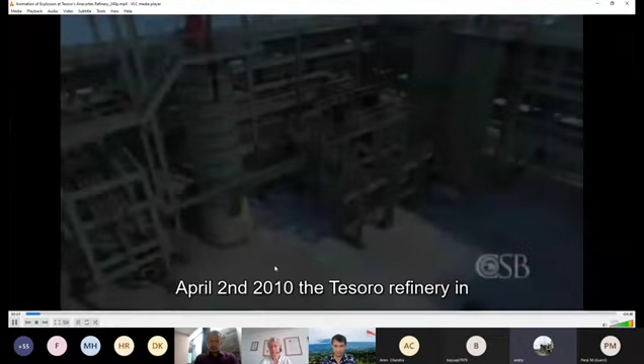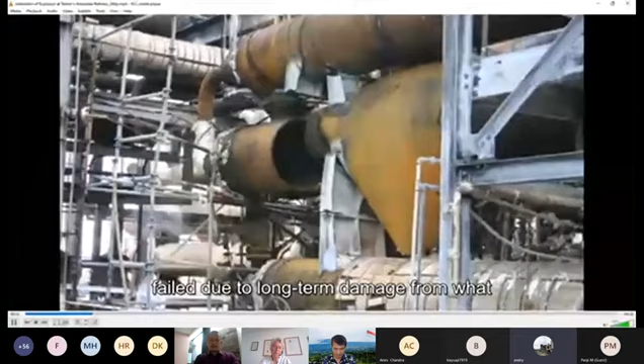April 2nd, 2010, the Tesoro Refinery in Anacortes, Washington. A nearly 40-year-old heat exchanger violently ruptures, causing an explosion and fire that kills 7 workers, the largest loss of life at a U.S. refinery since 2005. The Chemical Safety Board launched an investigation and determined that the heat exchanger catastrophically failed due to long-term damage from what is known as high-temperature hydrogen attack.

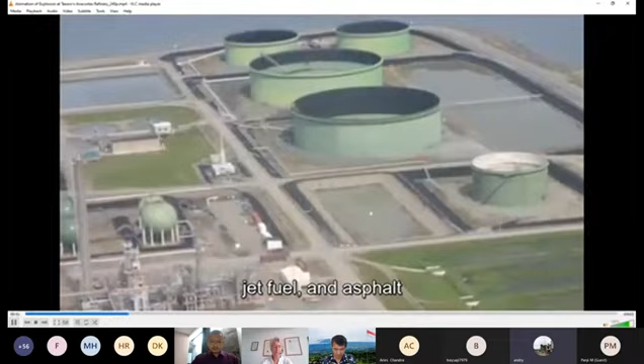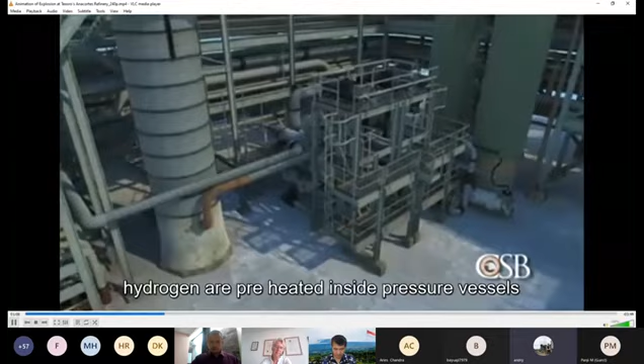The Tesoro Refinery in Anacortes is an 800-acre facility located approximately 70 miles northwest of Seattle. The refinery produces a variety of products, including gasoline, diesel, jet fuel, and asphalt. Within the refinery's naphtha hydrotreater unit, raw naphtha, a light component of crude oil, is treated to remove nitrogen, sulfur, and oxygen impurities. Before entering the unit's reactor, the raw naphtha and hydrogen are preheated inside pressure vessels called heat exchangers.

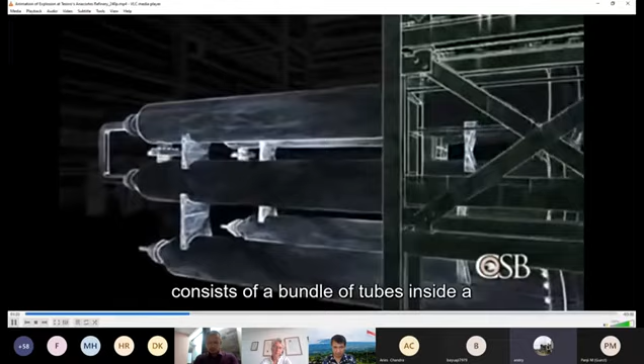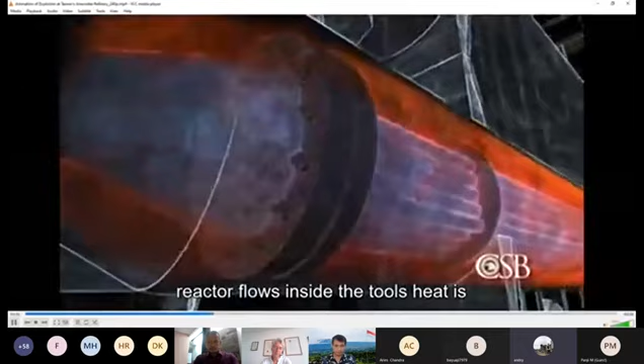The unit contains 2 banks of 3 heat exchangers supported by a 3-level steel structure. Each heat exchanger consists of a bundle of tubes inside a steel shell. Hot fluid exiting the reactor flows through the heat exchanger shell, while cool fluid headed for the reactor flows inside the tubes. Heat is exchanged through the walls of the tubes.

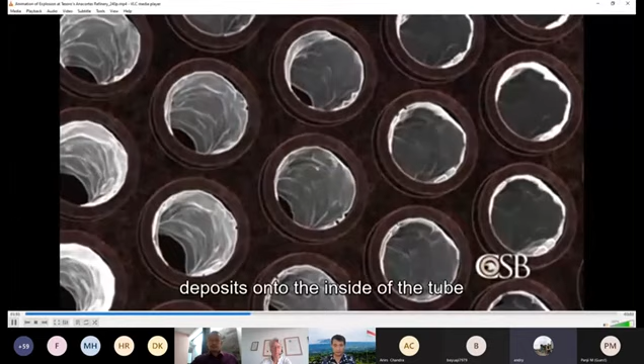Every 6 months, the heat exchangers are taken offline to be cleaned because of fouling, a common occurrence when operating heat exchangers in this type of service. As the raw naphtha is heated, a scale-like material forms and deposits onto the inside of the tubes, hindering the transfer of heat in the exchangers.

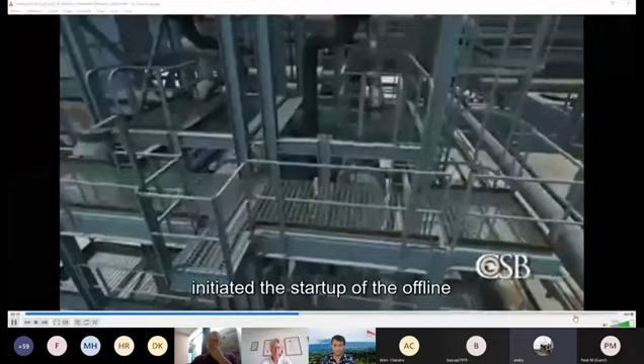On March 28, 2010, 1 bank of heat exchangers was taken offline and disassembled for cleaning, while the other bank remained in service. This allowed the unit to continue to operate. By mid-afternoon on April 1st, the cleaning was complete, and operators initiated the startup of the offline bank of heat exchangers.

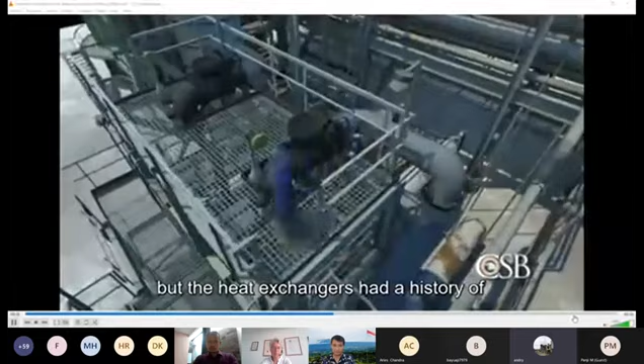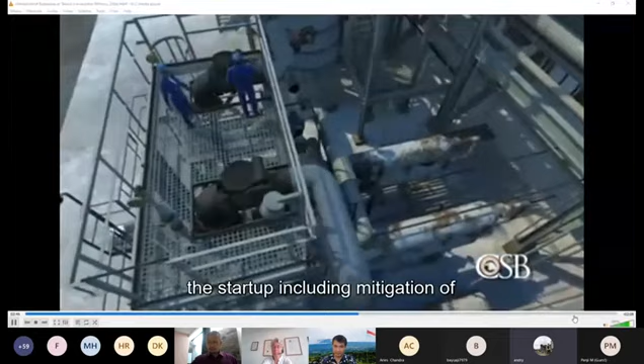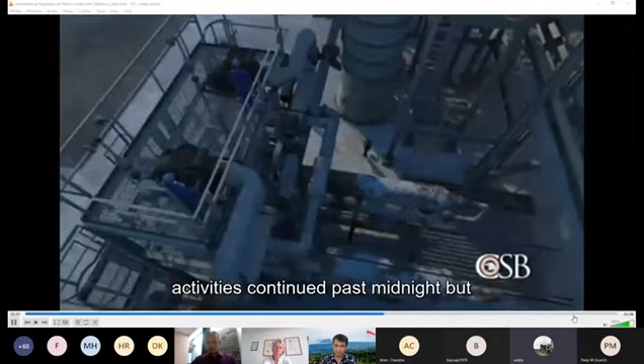The procedure required an inside board operator monitoring the control console and 1 outside operator opening and closing large manually operated valves. But the heat exchangers had a history of developing leaks during startup, something that refinery personnel had come to see as normal. Additional operators from other nearby units were called upon to assist with the startup, including mitigation of potential leaks. By 10:30 p.m., the outside operator was joined by 6 workers from other units within the refinery. The 7 workers were located around the heat exchangers, where startup activities continued past midnight.

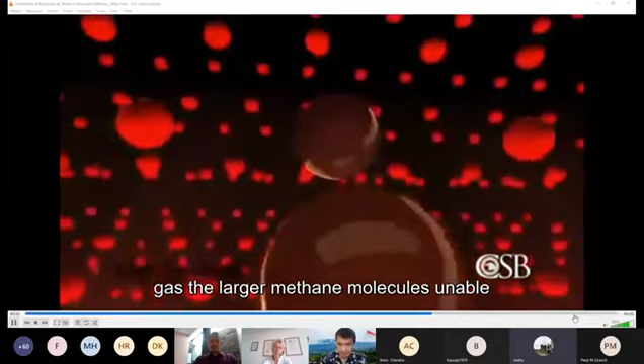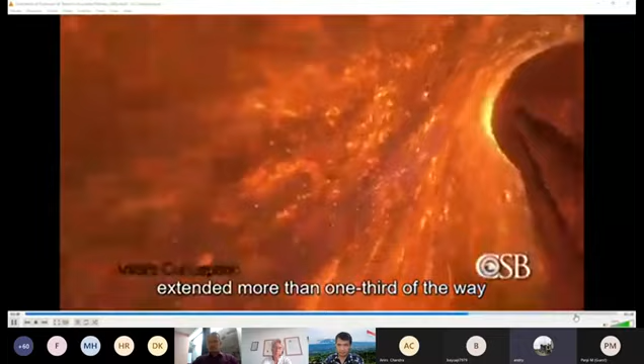But unknown to the workers, the steel shells of the middle vessels in both banks of heat exchangers had been severely weakened due to cracking caused by high-temperature hydrogen attack. This occurs when tiny hydrogen atoms diffuse into steel at a high temperature, then react with carbon in the steel to form methane gas. The larger methane molecules, unable to diffuse out of the steel, accumulate, stressing the steel and over time causing fissures. In both of the middle heat exchangers, the fissures grew and connected to form large internal cracks. One such crack was 48 inches long and extended more than 1/3 of the way through the vessel's 1-inch thick shell.

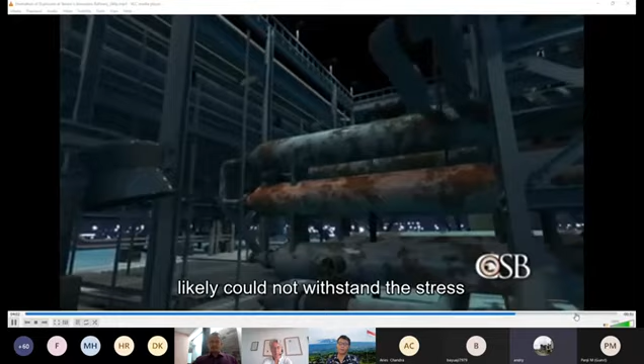Shortly after midnight, the temperature of the fluid exiting the tubes of the online bank of exchangers increased about 75 degrees over the span of 3 minutes, a temperature increase that was typical and observed in previous startups. But the middle heat exchanger was so severely weakened from high-temperature hydrogen attack that it likely could not withstand the stress caused by the rapid temperature increase.

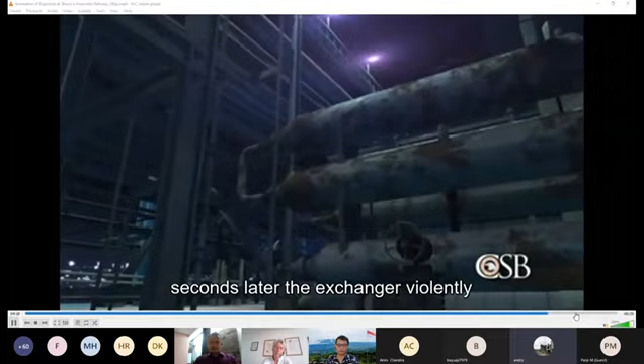At 12:35 a.m., employees working at a nearby process unit heard a loud hissing noise when vapor began to leak as the heat exchanger cracked at its weakest point. Seconds later, the exchanger violently ruptured. Hot hydrogen and naphtha vapor rapidly vented from the exchanger and spontaneously ignited upon contact with air, resulting in a massive fire that consumed the heat exchanger structure.

3 of the 7 operators died at the scene. The other 4 operators were transported to local burn centers with severe injuries. 2 died within hours. The other 2 succumbed within days.

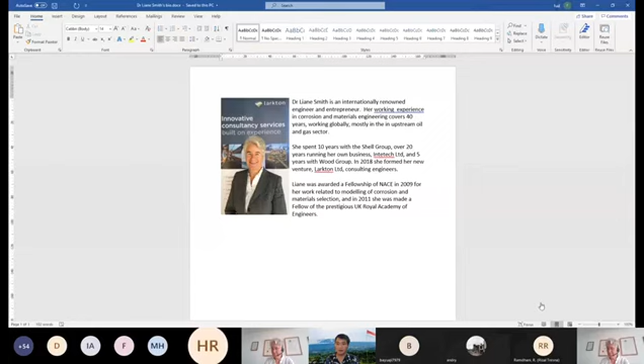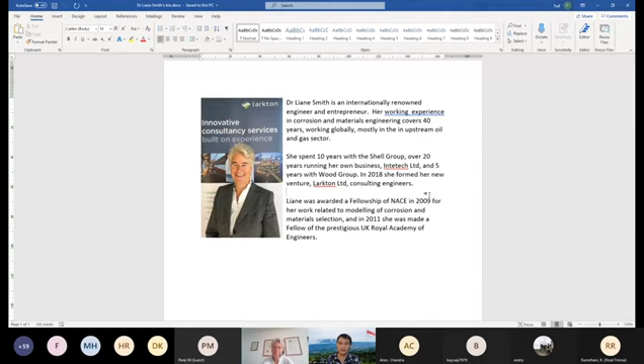Dr. Liane Smith is an internationally renowned engineer and entrepreneur. Her work experience in corrosion and materials engineering covers 40 years, working globally, mostly in the upstream oil and gas sector. She spent 10 years with the Shell Group, over 20 years running her own business at Intetech Ltd, and 5 years with Wood Group. In 2018, she formed her new venture, Larkton Ltd, consulting engineers. Liane was awarded a fellowship of NACE in 2009 for her work related to modeling of corrosion and materials selection, and in 2011 she was made a fellow of the prestigious UK Royal Academy of Engineering.

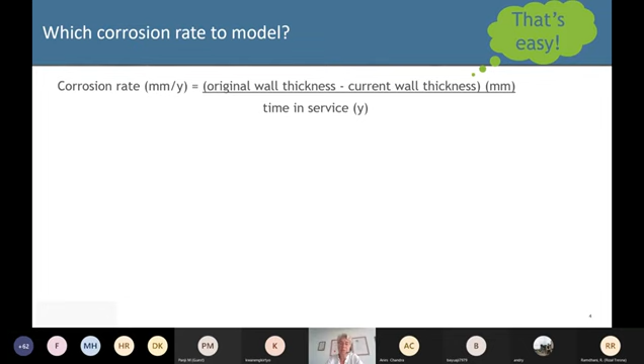So let's get started. We're talking about CO2 corrosion, internal corrosion—so what is the corrosion rate? That's pretty easy, isn't it? We all think we know: just find the difference between how much steel we had at the start, how much we've got now, and the time difference between them. So if it's that easy, what's the problem really?

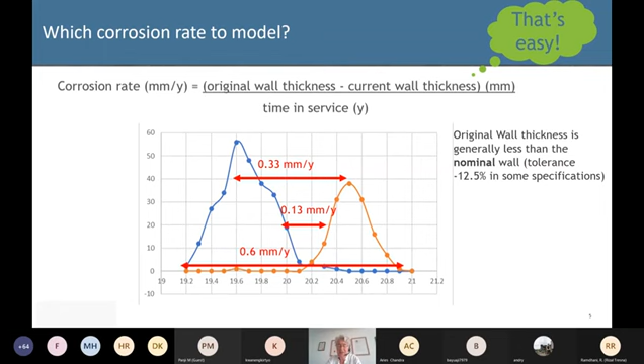The difference between original wall thickness and current wall thickness could be almost any number you choose, depending on what you pick for each. We normally work from the nominal—if you think about risk-based inspection, you ask what it was originally, and that's the nominal wall thickness. But the tolerance is up to minus 12.5% of wall thickness in some specifications, and fittings can be very variable in wall thickness—thicker on one side, thinner on the other. The inspected wall thickness is not necessarily the thinnest location either; even the best inspection methods are only sampling.

So even a 40-finger caliper tool, as I'm showing on the left, which can be pulled through tubing, will actually only be sampling maybe up to about 10% of the area of the pipe. So when people say to me, does modelling work? Does it represent real life? The answer is, well, we don't actually even know what real life is.

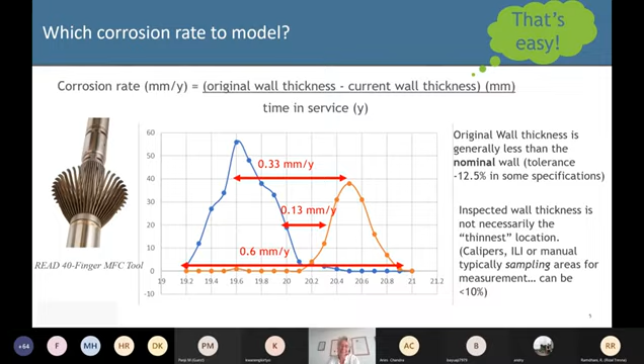So it's just to keep in mind that we do our very best, but corrosion engineering is a complex science, and there are difficulties with it.

They all corrode down to around the same depth. And this is what we call mesa corrosion. It's a term that got established for this type of corrosion. And I call it generalized attack.

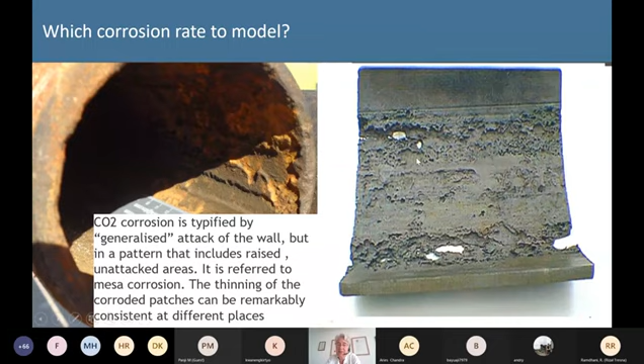So what we're trying to model is the rate of attack at the bottom of these mesas. So really, how deep are we going through the steel in the areas that are not protected?

In the early 1980s, I began work with Shell in 1981, and he was at the time working with me in the Netherlands, and we had the problem of CO2 corrosion arising in what was called the Groningen gas field, the largest gas field in Europe. It had about 0.7 bar of CO2, and at the typical temperatures of 40 to 50 in the field, we were getting corrosion rates of about 0.7 millimeters a year.

And you can see that if you could move this line on this nomogram and you could link up 0.7 and about 50 degrees, you'd go through around about 0.7 on the corrosion rate chart. So this is an illustration that's important, that when people do work on corrosion, they're working normally for a system. They're trying to explain something. And CO2 started with that gas field and trying to understand that gas field.

And then what happened, of course, is that people started to say, well, we've got CO2 corrosion elsewhere. We've got CO2 corrosion in other parts of the world. We want to use this tool. And it's a question about how widely can you stretch the use of a tool like that.

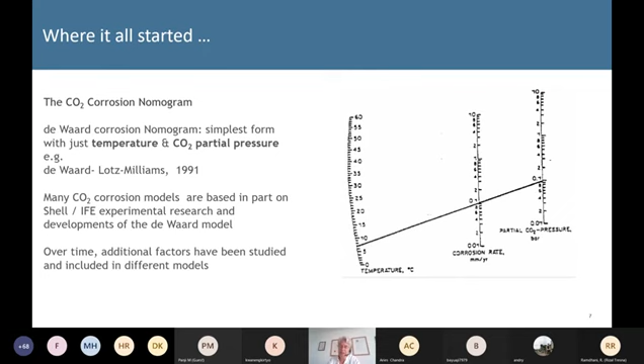Now, many corrosion models have been developed from this. This original research done by Shell in Amsterdam was expanded by a lot of work in the Norwegian lab, IFE, and over time additional factors were taken into consideration. But this is where it all began.

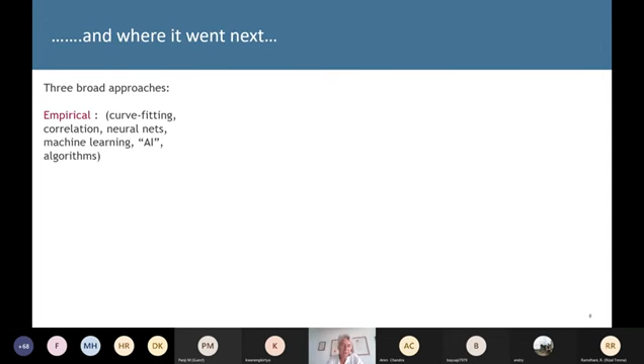Now, where are we with modelling nowadays? And I'm going to outline three broad approaches. We've got an empirical approach, we've got semi-empirical, and we've got a mechanistic approach.

Now, some people think that machine learning and AI and everything like that is new. I can tell you that in the mid-80s, Kees de Waard and I were having discussions about should we be looking at neural nets - that was the big topic to discuss. We thought a lot about it, but what was apparent was that it's even more focused, because when you build up a knowledge base that these systems can work in, you have to have a set of data.

You need an awfully large amount of good quality input data. Normally you need a training set of data that you use to set things up, to build your artificial intelligence and write your algorithm, and then you test it against other things. It's very difficult to give that system validity beyond where it started, just as much as the original nomogram, to be fair. But I can say that at the moment, success has not been great with CO2 corrosion.

There could be other areas where this does have success, and we now have such better computing power that there could be opportunities in the future, and we can come back to that at the end.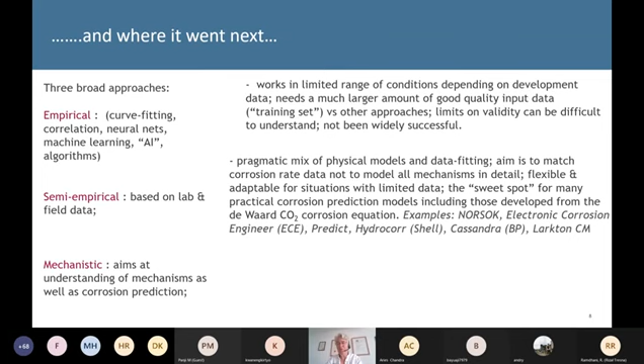They're all developed from the original de Waard CO2 corrosion equations, and improve on it and grow on that, with expertise built in from the different people who've developed these models.

Finally, the mechanistic model is really focused on the chemistry and understanding what steps are taking place, where the cathodic and anodic reactions go, what's happening to the protons and so forth. If we could really truly understand all that, the thought is that this would be the most correct approach, and it would be more accurate and widely applicable.

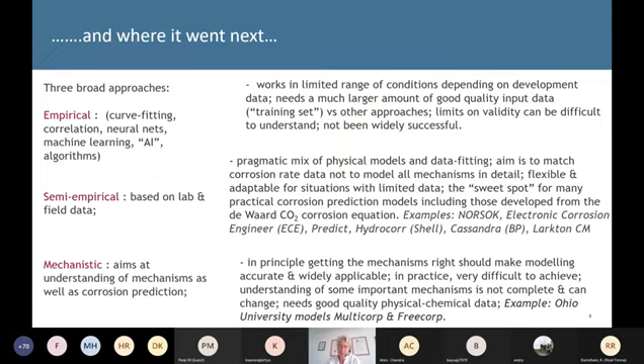But in practice, there's been a lot of very good work done by workers, particularly at Ohio University in the United States. But when they make major steps forward in understanding, their change in understanding means they almost have to put aside a lot of their previous work and start again. It's very challenging. What I'd say is their work has really opened our eyes and given us a lot of insight, helping to improve many of the semi-empirical models.

So going to the semi-empirical, which is where we are today, if you look in the literature papers, you'll find this basic resistance model. It says there's an activation energy.

If the activation energy is low, so we've got a fast reaction process, then we're limited in how fast the corrosion rate goes by how fast we can deliver corrosive species to the steel surface, and vice versa. If the flow is very fast, then the rate of corrosion is determined by how fast the reagents can actually react at the steel surface.

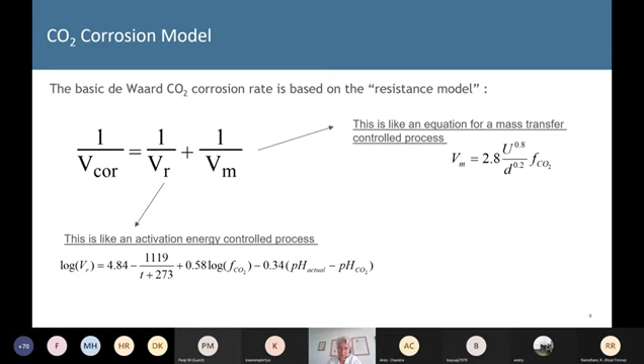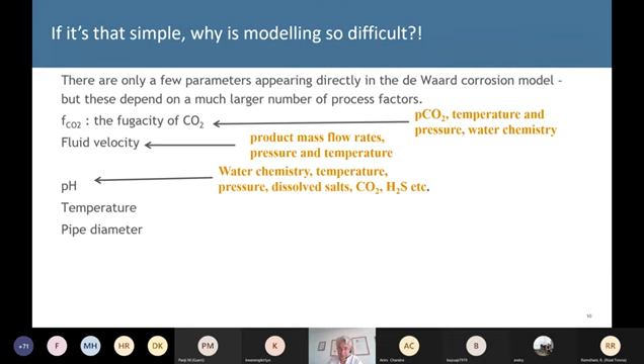The issue is that each of these factors is actually influenced by an awful lot of other factors. So when we want to take those five inputs into the equations, we've got to gather a lot of other data and detailed information in other areas. In fact, the list of inputs to our corrosion models is more like 15 parameters rather than 5, because of everything else we need.

And we need to manipulate that data and generate some of the inputs we're seeking. Then beyond that basic V-core equation, we have other adjustments to tune the CO2 corrosion rate, including whether we're getting oil wetting or scaling and other factors altering the environment and changing the corrosivity.

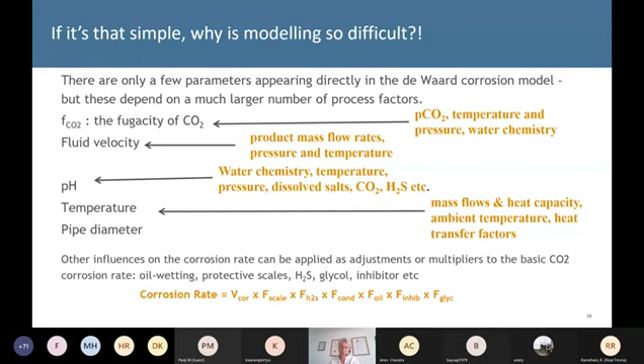So we end up with our equation: the corrosion rate we're trying to model is our theoretical V-core rate multiplied by a number of factors. We can call them fudge factors. They are adjustment factors, bearing in mind that our environment has special conditions that alter the corrosion rate. These have been fantastic in giving us the capability to tune field data to give a better match between what we're measuring and what we're modeling.

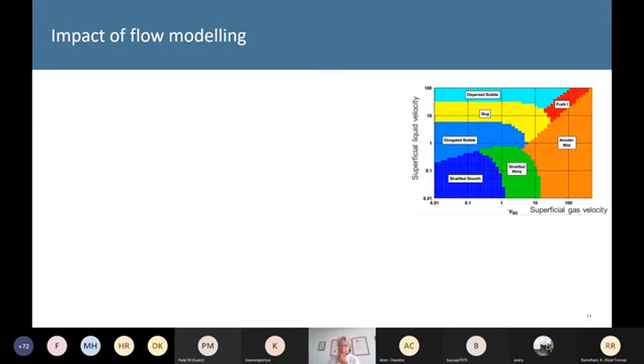Now I'm going to look into one area in more detail, which is flow modeling, because this is a very important topic. What we have on the right here is a flow pattern map, and there are a number of these available. This one is published by Petalas, and it's one of a whole suite of flow regime maps he gives for horizontal flow, vertical flow, in a variety of different conditions.

We've got different kinds of flow, and here we're thinking about multi-phase flow where we've got gases and liquids flowing. When we have these different flow regimes, some are what we'd call symmetrical and some are not. Annular flow, slug flow and so forth—these are flows where the same environment is effectively passing the steel along all surfaces of the pipe.

But a stratified flow will give us a separate gas cap and a lower liquid layer, and that is where we can start to see top-of-the-line corrosion, oil and water separation, etc.

Now, there are specialist modelling systems out there by a number of companies that give us insight into this flow modelling, and these are extremely valuable to really understand. If you're going to spend millions of pounds on a pipeline, then probably you are going to get a full hydrodynamic study of it, and the data from that can be very helpful to input into our understanding of how to corrosion manage the pipeline. But that kind of software is geared at understanding pipeline sizing, pipeline flows and so forth, pumping demands and all that kind of stuff.

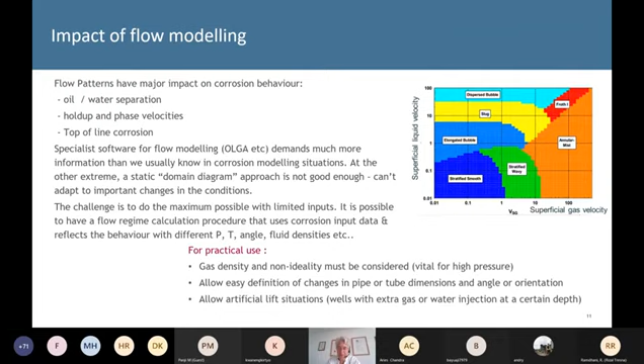What we feel is that you need to take into account that you don't have ideal behaviour in gases. That's one important thing, particularly at very high pressures. We definitely need to take into account the tubing deviation or pipeline elevation, because the angle of flow of fluids is important. And in wells, we have the injection of gas at certain depths or the injection of water in some kinds of secondary recovery, and those need to be considered. So all of these things need to be considered in the modelling, which make it a practical model, and these are not readily incorporated within simple flow modelling systems.

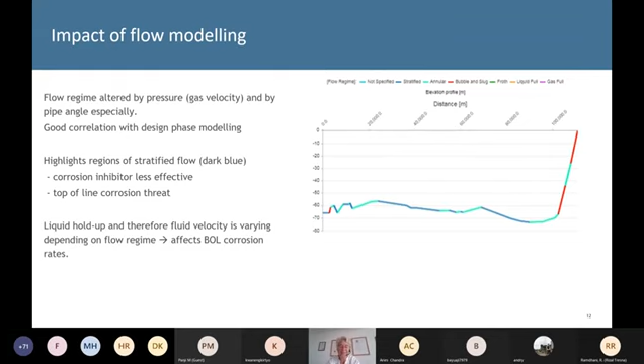At these different areas, we'll have areas where perhaps we can't guarantee that corrosion inhibitor will be spread to the top of the line. We can't guarantee that we'll be able to protect this line. And it immediately tells us how we're going to have to adjust our corrosion management to include pigging to push fluids through and things like that. The varying flow velocity will affect the bottom of line corrosion rate.

And related to this, we have the question of water separation. Oil and water is flowing along the bottom of the pipeline, and it will be carrying the water in an emulsion, which is actually completely contained. If you look at the structure of an emulsion, as long as the water is inside the oil, it's surrounded by oil particles, molecules, and these are protecting the water from actually impinging on the steel surface.

But when we have stratified flow, we have slow-moving, possibly stagnant conditions. It can take days for a molecule of water to get from one end of a pipeline to another. It's held up at various places, and in those conditions we can get water separation. So we have an oil wetting factor, which is determined from this equation, and we have within that a water break element, which is related to the API gravity.

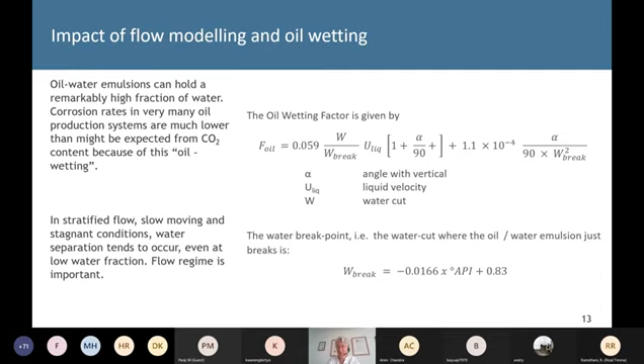Now this part of the factors affecting corrosion was determined from real field studies actually carried out by myself and other workers in our business at a certain point in time. It was published data, and it's been picked up by many of the public models, but not all of them. And we think this is one of the key factors that helps to explain why we get certain behavior in the oil business. That question of water dropout is also affected by pipe diameter.

On the left, we've got a classic example of a line carrying oil, and you can see the groove in the bottom of the line that's been caused by the water dropping out. Because notwithstanding the previous equation I showed you, fundamentally there's a certain velocity at which even the smallest amount of water will eventually separate out from an emulsion. And in the typical diameters that we're mostly dealing with, around 0.2 to 0.3 of a metre, we're about 1 metre a second, but there is a variation with pipe diameter about this dropout velocity.

But what we often see is that people oversize pipelines. It's a general trend of pipeline designers, and I always stress to people that if you don't get the velocities right, the risk of actually having a long distance separator between your fluids in and your fluids out is very high, and we see a distressing amount of damage on oil pipelines due to this problem.

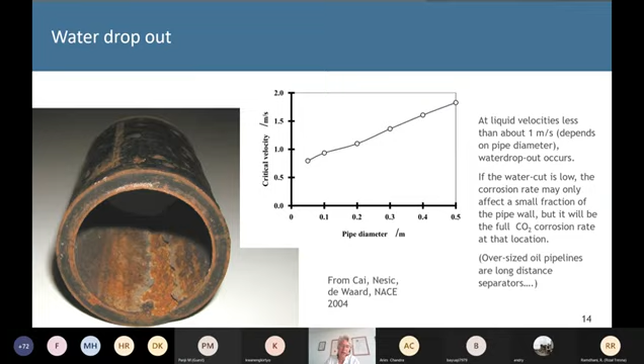I'm moving on now to the second two topics: scaling and inhibition, and pitting.

The first one is bicarbonate scaling, and part of this is those mesas, where the surface that's not attacked is generally covered with a bicarbonate film. As the temperature increases, that iron carbonate becomes increasingly protective and adheres increasingly strongly to the surface. We have to consider that while corrosion normally increases with increasing temperature, it reaches a point at which the protectiveness of the scale starts to counteract that, and we get a drop-off of corrosion rate.

So we have this scaling effect, which is derived both from laboratory experiments and also from observations in the field. The actual scaling temperature is not always the same, but typically between about 55 and 75 degrees C we start to see this drop off.

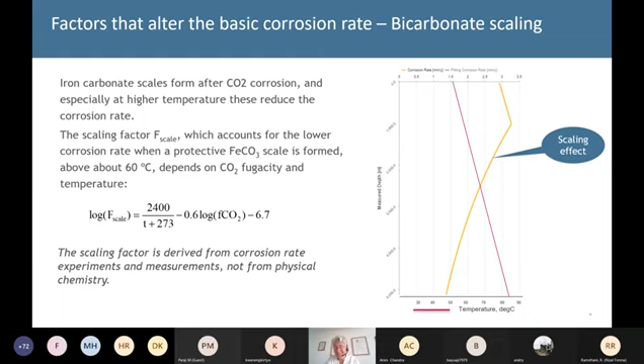Typically in a well, you have higher bottom hole temperatures, and the temperature drops as we come to the surface of the tubing. The corrosion rate very often follows this pattern, where we've got a higher corrosion rate going to a point, and then scaling kicks in more strongly, and we get this drop off. So the thing to be aware of is that the corrosion you measure at the highest temperature—don't assume that's the highest corrosion you'll ever see in the system. It could be at an intermediate temperature, because of this problem.

Now moving on to sulfide scaling. Hydrogen sulfide is found in many parts of the world in reservoir fluids, and it also comes into aging reservoirs as a consequence of seawater injection over time. So even fields you've known as sweet, CO2-only fields, can eventually get H2S in them. It's a weak acid—it dissolves and reacts with the ions in solution, removing them as iron sulfide, which tends to deposit on the surface as a fairly adherent film.

Now, it's been very difficult to get modelling of this from any kind of laboratory experiment, because all you measure in laboratories is a real low corrosion rate. It's hard to get anything really practical from it.

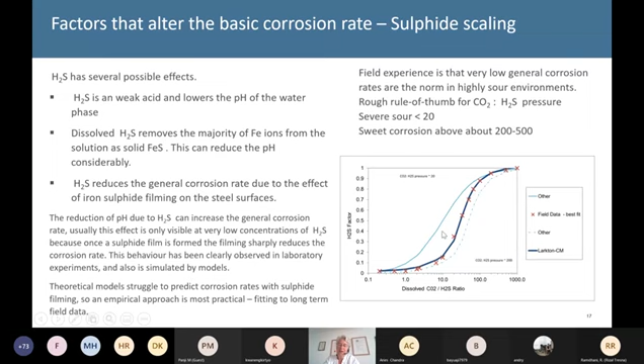But as you get increasing amounts of H2S, you get down to the bottom here and you'll get a real drop down of your corrosion rate. The blue line is the Larkton software model we've fitted to this data. There are two other models we're aware of out there, and one of them tends to give, we think, overconfident reduction—we think corrosion rates are actually a little higher than that model gives. Another model is rather too conservative and isn't really taking proper benefit of what we see. We do a lot of work with sour service, so we have confidence in this.

Try to remember these facts about the pH, because I'll come back to that in a moment. I don't want to spend long on this—this is a Pourbaix diagram for the iron sulfide system, and I just want to say that there are many forms of iron sulfide, and they are non-stoichiometric. That means the ratios of iron and sulfur aren't perfect, and they're not terrifically stable molecules. You get shifts between them, and their stability varies with pH as well, and temperature has a factor, and also chloride content as a factor.

Many people have studied this, particularly ExxonMobil have a number of key presentations and papers on it, and Total as well.

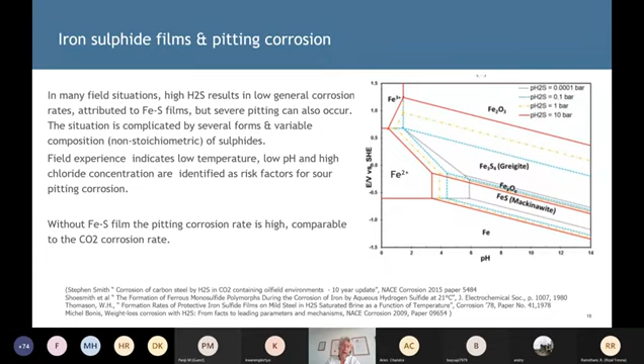These help us understand why we get instabilities, why a sulfide film, whilst it's a wonderful thing, can be destabilized in certain conditions, leading to localized pitting. When we get pitting, we break through that sulfide film, and the corrosion rates we've seen are comparable to the CO2 corrosion rate.

Quickly moving on, top of the line corrosion in sweet systems has been extensively studied, and it's shown that the top of line corrosion rate is related to how fast condensation is taking place and the solubility of iron. If we've got a fast cooling rate, we get a high condensation rate and a high top of line corrosion rate. But as the iron concentration builds up, the iron solubility drops, and the corrosion rate drops off. We've got modelling related to this, and it's a pretty reliable model for sweet corrosion, used in many models globally.

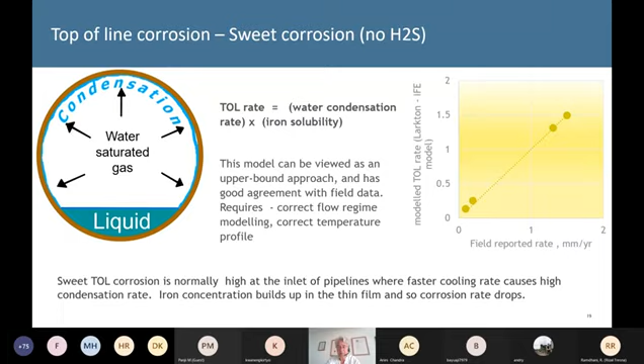I want to point out there's an area where we really don't know too much at all, and that's top of line corrosion in sour systems. This paper by Svenningsen in 2015 is a key reference to bear in mind. He's done laboratory studies. What we need to mention is that they're all rather short term, with small test areas. But the kind of effects he's showing is that corrosion rates are surprisingly higher at lower temperatures.

As you see here, H2S levels don't particularly affect the results, but you tend to get even less corrosion if there's high water condensation. And there's some impact of acetic acid, which is presumably affecting the pH. So there are some strange effects here, but just look at the kind of top line corrosion rates we're getting - these are quite serious, plus or minus 0.4 millimeters.

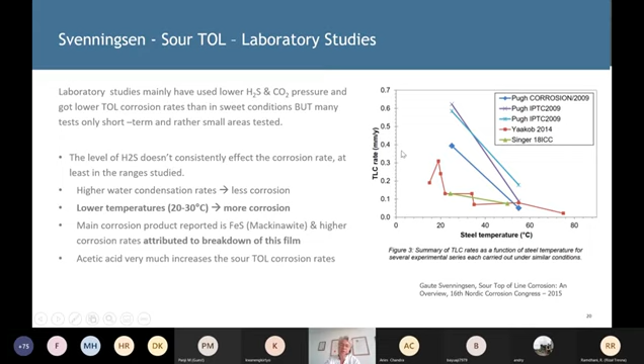He also publishes this data table, and these are the top of the line corrosion rates highlighted here, and you see that in the field we are seeing corrosion rates like this.

Mike and I have currently been looking at a case with top of the line corrosion rates in a sour pipeline of about 0.7 millimeters a year. Very serious corrosion rates, very difficult to control, because these don't arise at the start of the pipelines particularly - they can arise some distance along the pipeline. So it's rather different to sweet corrosion and very, very challenging indeed.

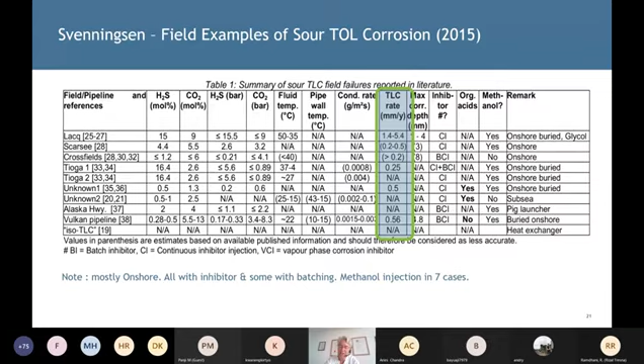So this is an area where there's further work needed - there's no predictive model for this at the moment. We feel the issue could be related to the pH effect and the fact that ions are removed so easily from solution by H2S. We think the relative stability of this product FeS compared to iron carbonate means you don't get that build-up of ions that you do in the pH conditions at the top of the line. So in sweet corrosion, you basically reduce the solubility of your iron over time, but that may not be happening in the sour system.

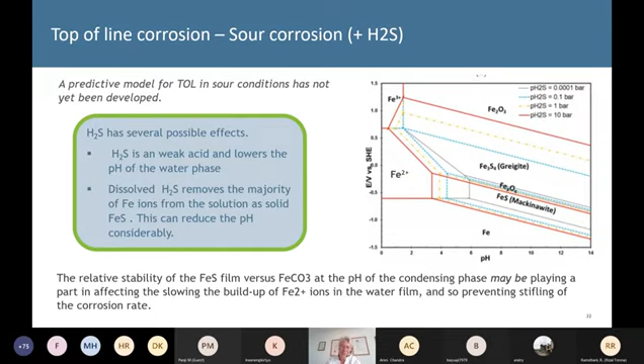Finally, inhibitors - it's fairly well established that the effectiveness of an inhibitor depends on efficiency, which is normally extremely good because that's just good chemistry. Get the right molecule and you've got a high efficiency. The availability is whether the inhibitor is actually at the surface of your steel, and that depends on the engineering system you've put in place - whether you're batching, whether you've got good distribution of the inhibitor - and you need to measure the residuals to confirm you've got good coverage of the surface by the inhibitor. We talked about flow regime, and different software systems use different approaches.

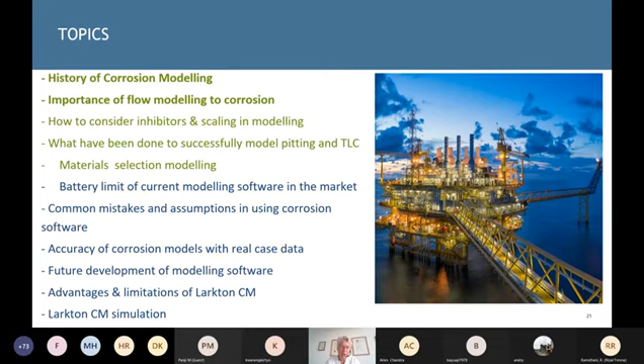I'm going to briefly touch on material selection modeling and then move on to this group of topics in blue, and then we'll take some more questions at the end of this section before the demo.

So the modeling of the performance of materials—what we are aware of is that stainless steels have different levels of success in CO2 and H2S conditions. Even in sweet conditions, materials like 22 chrome and 13 chrome, which are very widely and successfully used, do have their limits related to, as you see on the left here, chloride concentration, CO2 and temperature limits.

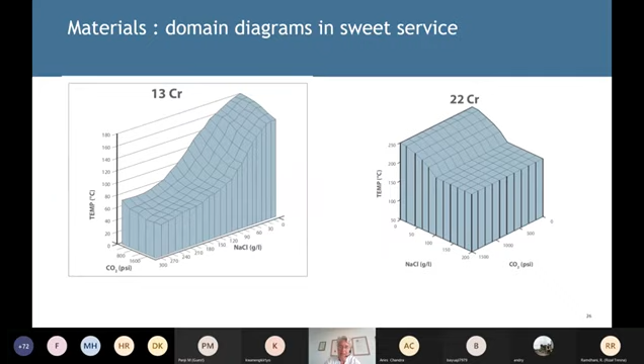These diagrams I'm quoting are from a Nickel Institute publication I produced with Dr. Bruce Craig, updated in 2011. Basically, if the temperature exceeds the upper surface of these 3D contour diagrams, you'll start to get a breakdown in passivity. We rely upon the chrome oxide film on the surface, but that film is affected at certain temperature conditions. We also know there is a pH at which passivity breaks down, and with some oil conditions we can definitely get below the passivity stability pH, which can cause pitting.

We also have the risk of cracking with some of these materials in sour service, and we can turn to the ISO 15156 standard for a lot of guidance, as it has various limits in it. But also, there are other sources we can go to get information. For instance, there's a pH limit of about 3.5, which is a barrier between cracking and not cracking of 13 chrome in sour service.

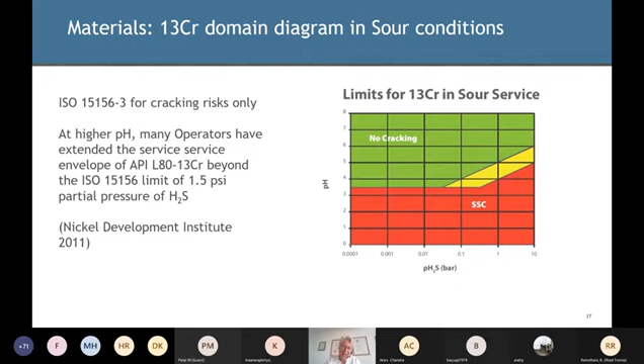But in fact, at a pH below 4, 13 chrome will already have depassivated and started to pit. So there are other limits that affect the performance of materials, and we need to take a holistic approach of all these different mechanisms. There are also diagrams for different nickel alloys, taking into account the effect of hydrogen sulfide on their stability and usefulness.

All of these diagrams are incorporated into software like the ECE and also Larkton CM software for material selection. So now the question is, how do we translate all of this wonderful laboratory data, field data, and specification data? How do we get that across to people?

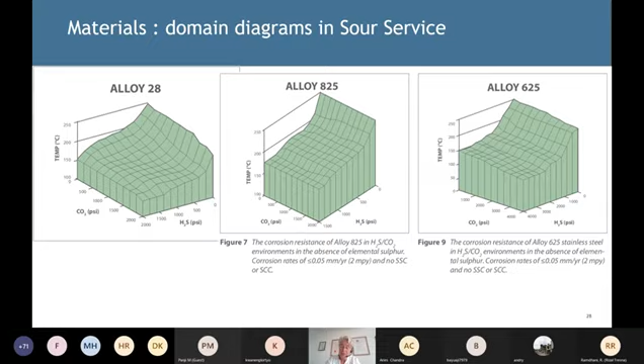In the ECE, the familiar approach was to allow people to put in a set of test data on the left-hand side and get traffic light results on the right-hand side. This is showing a tab for ISO 15156 data - is the material allowed or not allowed in that standard? The ECE evaluation rules were following a set of rules about what I've just been illustrating to you.

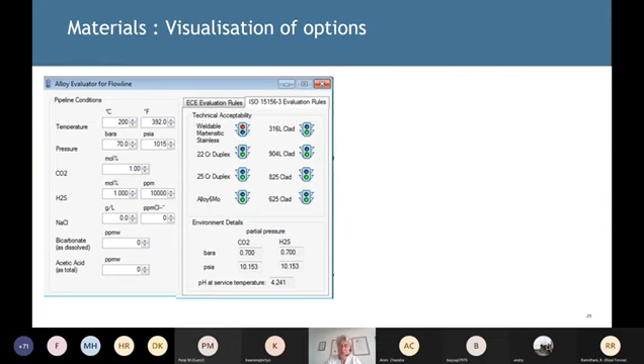In Larkton CM, you have your input values to put in, and you can have multiple streams to analyze at the same time. When you analyze these, you'll get a list of materials and then two indicators: one is whether the material is allowed or not allowed in the ISO standard, and on the other hand, whether it is a low, medium or high risk.

So let me just remind you that in both ECE and Larkton CM, the approach is that the ISO standard is there only to give you guidance about cracking in sour service, sulfide stress corrosion cracking only, whereas the risk evaluation is saying that these materials might suffer general corrosion, pitting corrosion, chloride stress corrosion cracking internally and so forth.

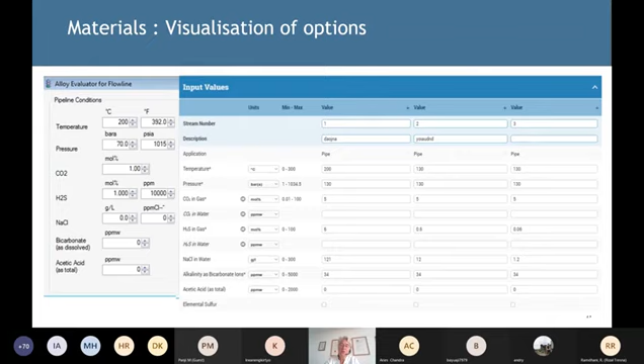So for the different conditions that we've considered here, which are all varying sets of conditions, we've got different advice, and sometimes the ISO standard is saying there's a problem, and we're saying yes, there's a high risk associated with those conditions. But in some cases we're saying our experience shows us that these kind of materials will work perfectly well in the conditions you've got, despite the advice in the ISO standard.

So in some cases we will go ahead with the use of certain materials, but where ISO is a required standard, then you have to follow its requirements for materials.

I'm looking now at the other topics - I was asked to discuss the battery limits. We talked about the fact that these models are suitable from the bottom hole right through pipelines, and they're pretty generic models, but they are mostly focused at sort of the mid-range of conditions, because that's where we've got lab data or field data.

Different models have a different capability to model practical conditions. Some of them are better at handling the elevation profile of pipelines, or actually looking at the wells and looking at bubble point, the impact of secondary recovery and that sort of thing. These are not very well covered by the majority of software, and they also tend to be limited in the high pressures and high temperatures you can go to.

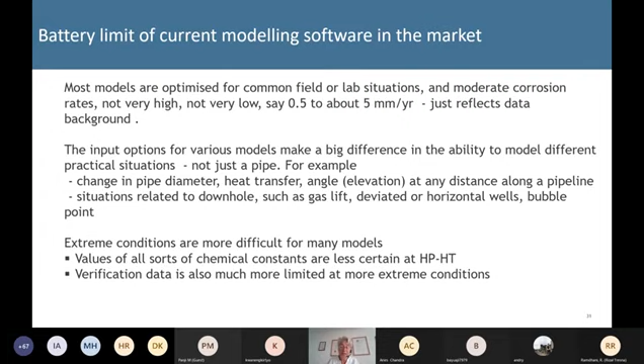And you have to bear in mind that we depend upon physical and chemical constants in various places, and they're just not known - they're just not available for some of the more extreme conditions that we deal with, for example, injected gas systems, which can be ultra high pressure, and we have to be aware of the limitations of the models.

Mike and I published a paper along with other authors on this subject in 2010, and there's not been a great deal of advance in CO2 sequestration since then. So it's probably still quite relevant, the analysis we did at that point.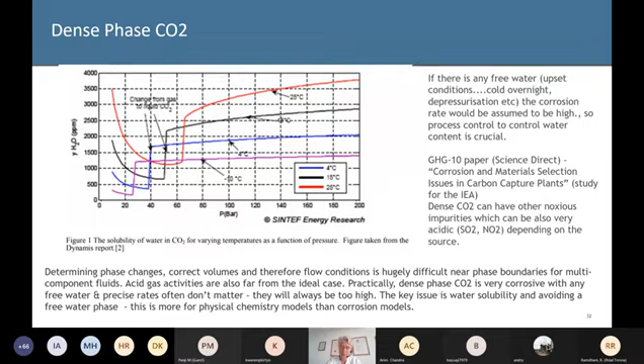Now I want to talk about the ways people misuse models, and common traps that people make. The oil industry has a peculiar use of the terms M and capital M, and double M and double M, and this is not understood in the same way outside of the oil industry. So people who come into this topic from universities are often bemused by the units, and I often do see factors of 1,000 wrong in flow rates that people put into software because they've misunderstood this.

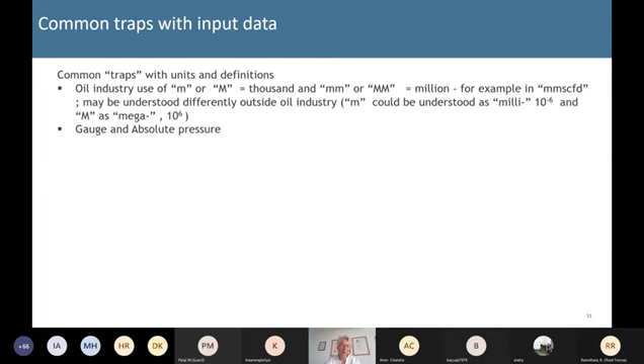The pressures that we're using in the models are absolute pressures, and often the data we have is gauge pressures, so don't forget to add on an extra bar of pressure on the data.

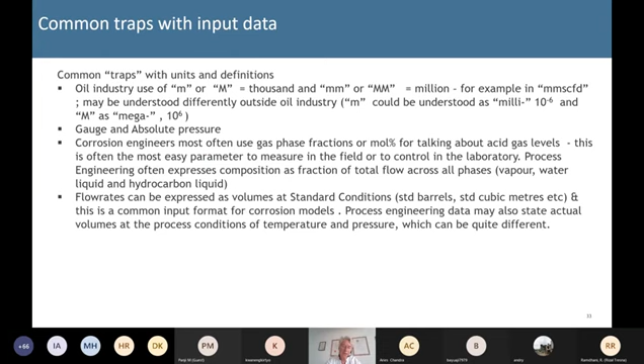We talk about mole percents and fractions in the gas phase often, whereas process engineering often gives these as fractions across all phases. So take care that you interpret the data you're given in the correct way, or ask for the right data. Flow rates are at standard temperature and pressure conditions, whereas process engineering data can often be at the actual conditions. Huge difference there, huge difference.

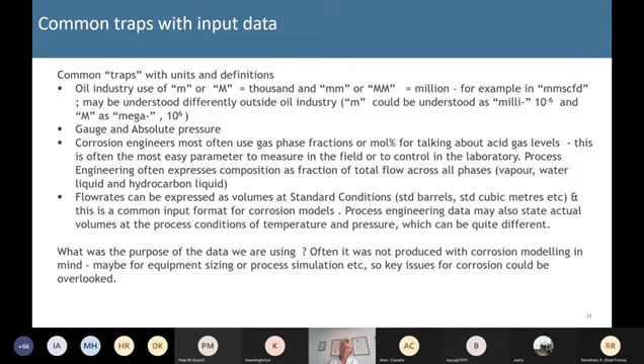So again, ask for the right input data, and think about the source of the data. People are not often collecting data for the benefit of the corrosion engineers. They're collecting it for sizing equipment or for reservoir engineering, planning, and all sorts of other reasons. So key data that we need for corrosion are overlooked.

Some data is very badly collected, and some of it we really need to care about and some of it we don't need to care about. Flow rates are generally accurate enough, but acid gases, we have to be very careful about how they're sampled. They do have to be ideally sampled in pressurized bottles, not plastic bottles, and the actual analysis of them in laboratories has to be done with care.

Process data is often very precise, but the ppm levels they give might not have enough significant figures to see ppms of H2S, and that can be very important.

You have to question whether there's water in lines that they say are water-free. And you have to bear in mind that salt carryover is not covered by process engineering, and we often get the issue about when we're selecting particularly CRAs, do we have a chloride concentration in this water or do we not? Is it salt-free? How much is that carried through in droplets through a plant, for instance?

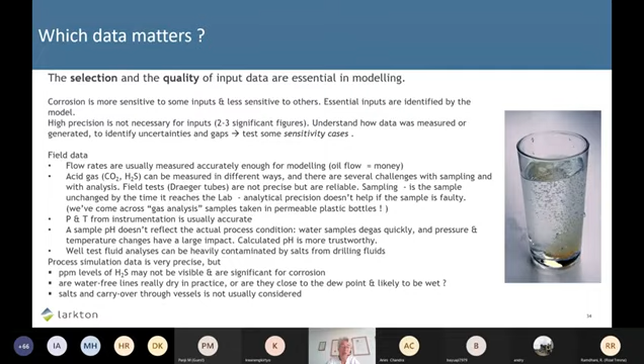The other thing is that you'll often get many operating cases provided to you as a corrosion engineer, and then you've got to question, you know, you've searched through these different summer and winter conditions and different years, and you pick which one you're going to actually model.

And the service conditions can be very varying, and you have to think, are these extreme conditions really realistic, or what should you be doing?

Now, we always say that corrosion is a gradual process. You're looking for the typical conditions to get the wall thickness loss over time. Transient extreme conditions for a few weeks, even a couple of months, are not going to massively affect the integrity of the equipment over its lifetime. But it's worth looking at a few sensitivity cases.

But if you think about it, cracking can literally happen within a matter of hours or days. So you do need to look at those extreme conditions when you're picking alloys or considering other cracking mechanisms.

Take care with the design pressures. These are for the mechanical design. You need to be working mostly with operating pressures. The maximum operating pressure for cracking is relevant. Don't be too negative, don't pick the worst conditions and end up with something you can't afford to build.

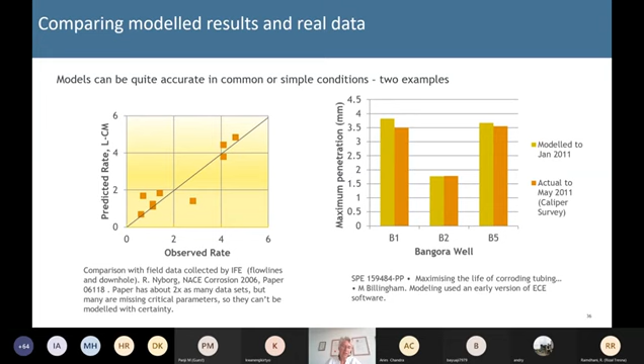On the left-hand side, there was a paper published in 2006 by Rolf Nyborg. It tested a number of models, which at the time included the ECE model and various others like Predict, and several others not identified, against a number of data sets. We were always very critical of this paper because he didn't have all the inputs that all of the different models needed, and yet they were all judged against these data sets. But we've picked out from that paper about 8 data sets where we could actually utilize the information, and we got a reasonable prediction, and the ECE was also a pretty close match to these.

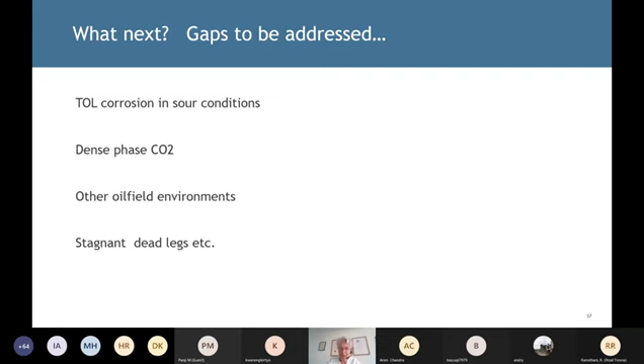So where are the gaps in all of this modelling? I've talked about the top of line in sour service conditions, the challenges of dense phase CO2. There are other oil field environments to be considered. Some refinery environments could be given consideration, where there are other additives in the streams to control local pH, and some higher temperature conditions not adequately covered by current models. Then we've got stagnant dead legs and other challenges, where we move not necessarily the environment but to a different mechanism. How do we get people to realize that CO2 corrosion is only part of the story, and there are other mechanisms out there? So there's a number of gaps to be addressed.

I'm going to pause for any questions on this now.

I'll move on, thank you. So we can continue with the simulation. This is what people have been waiting for. Okay, right, two quick slides then.

First of all, the Larkton CM model, as we've explained, if you use the basic settings, gives you the same kind of results you've seen in other models based on the CO2 de Waard nomogram. But if you want, you can use more advanced settings with Larkton CM, and I'll show you some of those. It's got a really wonderful interface to work with, which I'll demonstrate shortly. And then it's got an option to use flow modeling, which is terrific, and a much expanded selection of materials.

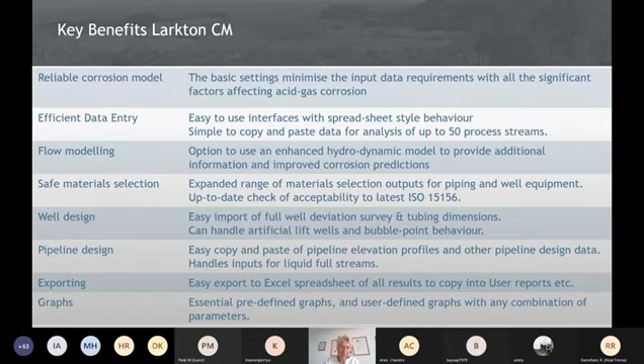It copes really well with wells. We can put a full deviation survey in. We can handle bubble point behavior and different artificial lift systems, and it copes with elevation profiles in a very easy way. So I'm going to move on.

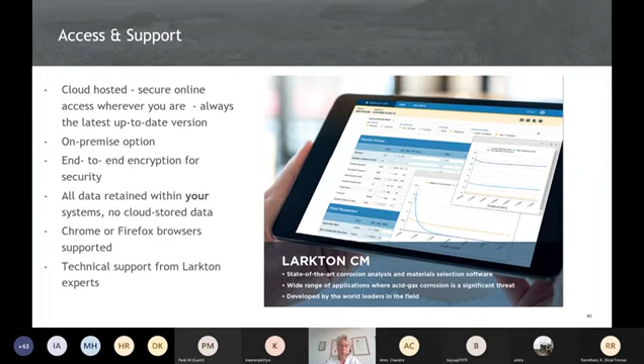It's cloud hosted, so you can access it anywhere, even on your phone. It's a bit fiddly, but you can really get to it wherever you're on the internet. There is an on-premise option for those of you whose businesses require that. It's very secure and you get great technical support. We don't have any of your data on the cloud - that's the key thing to bear in mind.

Pak Kuku, you want to do some closing?

Yeah, I think before we close, let's take a picture together. You can activate the camera, and let's have some more pictures. Let's take the picture. Okay, cheese everybody, 1, 2, and cheese. Wait a minute, okay, another one. I think if I can change the background in together mode, is there any option? Another one. 1, 2, and cheese. Okay, thank you, thank you, so yeah, thank you very much.